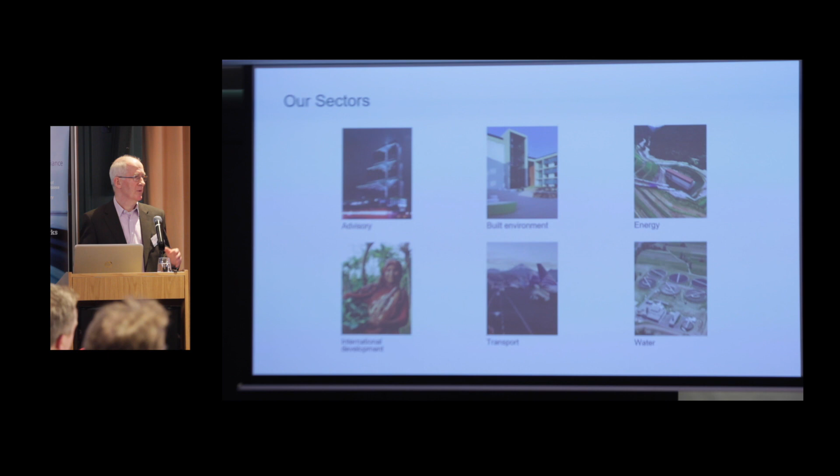We work across sectors - advisory, built environment, energy, international development, transportation and water. This project was primarily transportation, but with a significant amount of built environment, so we married those two quite successfully.

In Ireland, with offices in Dublin, Cork and Belfast, there's 150 of us, or more than that at this stage. The sectors we operate in are primarily transport, water and power - that's what you know us for - but we're also involved in the built environment and in buildings.

Within the overall Mott MacDonald group, there's plenty of scope for BIM. We're fully committed to BIM - it is part of our core strategy. These are just two extracts from our internal intranet showing the level of guidance we have within all these areas.

We have a whole series of documents telling us how we should do it, what we should do. On the right-hand side, we've separately had a Go Digital 2018 strategy for the last 4 or 5 years, and we're just about to achieve that - we've gone primarily digital at this stage, which is all part of the process.

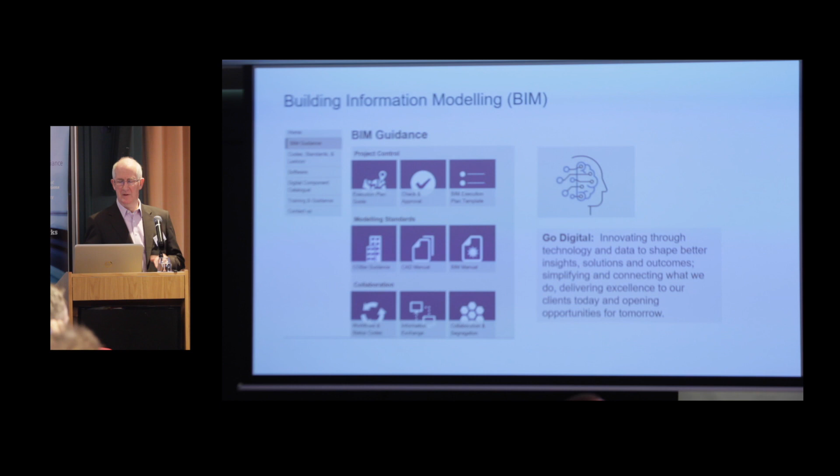This was where our digital transformation was in about 2014. We've moved on a fair bit since then.

So, Bergen Light Rail - I'll talk a little bit about it from a project manager's viewpoint. How did it affect my life as a project manager on the project? And John will tell you more about the technical details.

Bergen Light Rail. Bergen is a city about 60 degrees north, population about 300,000. Small for a light rail, yes, but the mountainous terrain meant that the development is linear, and that linear development is ideal for a light rail.

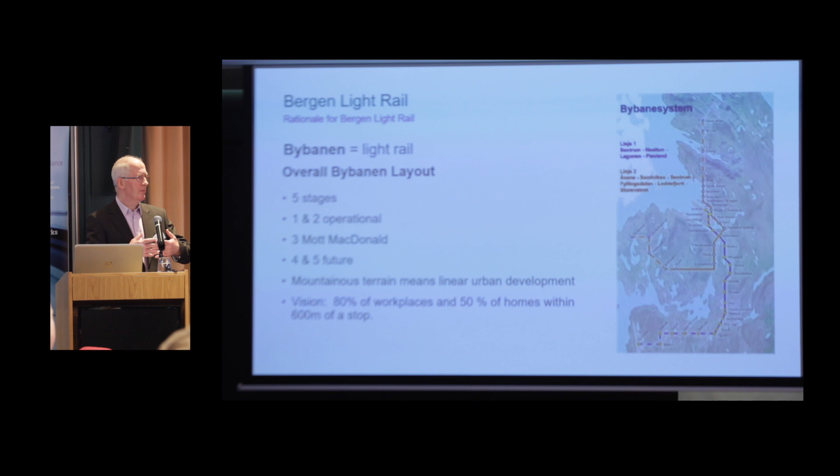The vision of the overall project, stage 4 and 5 future, is that 80% of the workplaces and 50% of homes in the entire city will be within 600 metres of a stop, which would be fantastic when it's fully rolled out. When we were appointed for stage 3, stage 1 was operational and stage 2 was still at design.

A more detailed look at the scope. There were 8 kilometres overall, 6 tunnels, 4 bridges. We had a significant maintenance workshop and depot. There was a parking hall there - a lot of snow in Norway in the winter, so you have to keep the trams warm at night.

An administration building. In addition, we had a two-storey park and ride facility with the tram and the feeder buses interfacing on the roof of the facility.

So this is a project that is ideal for BIM. It's a no-brainer that you use BIM on a project like this.

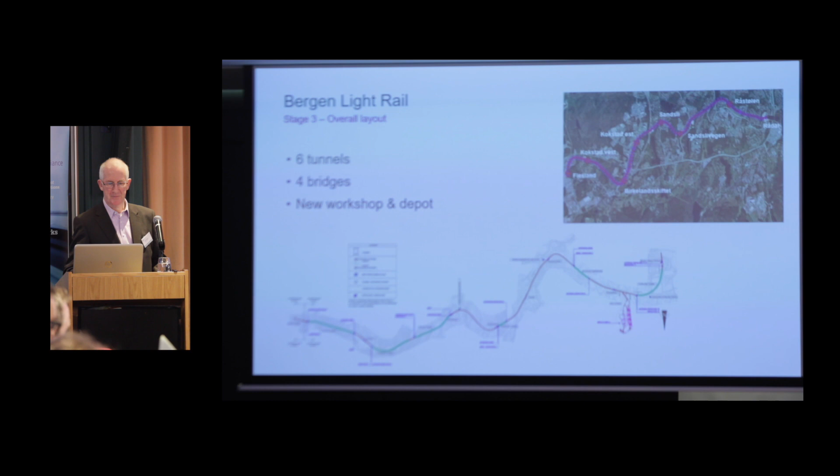This is the overall programme. We were appointed at the beginning of 2012 for the main project and mid-2012 for the associated depot project. The requirement to have the system operational by mid-2016 was a significant programme challenge, particularly when you take into consideration that our first task was optimising the client's concept design.

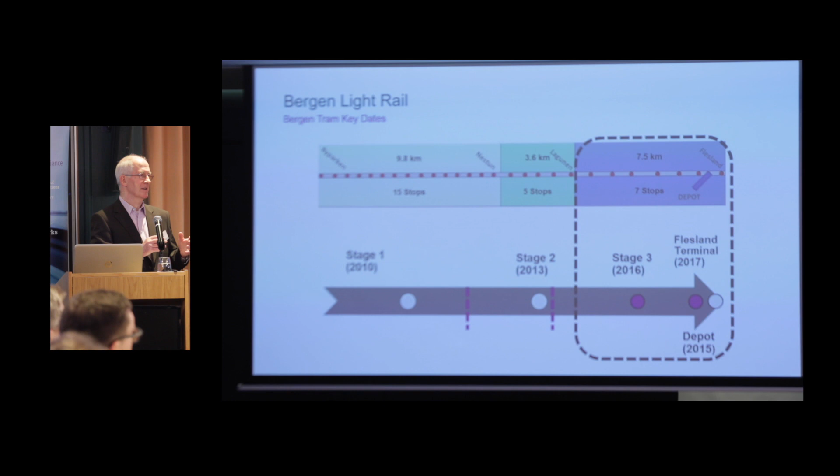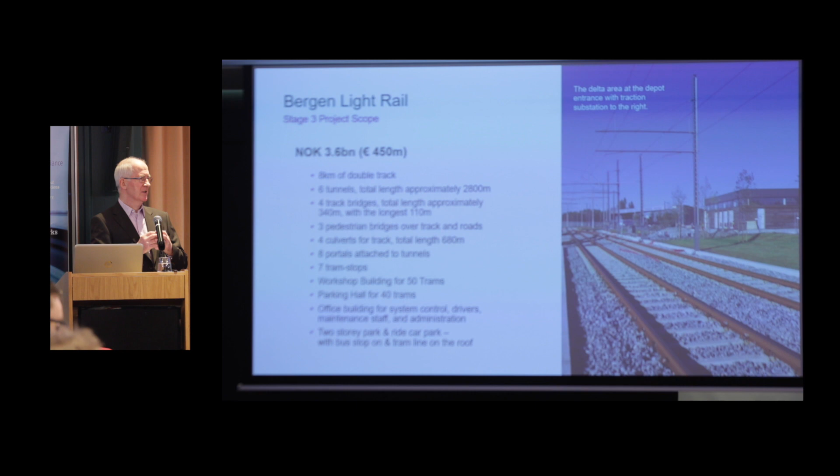A more detailed look at scope - this is the scope of the project. Our scope of services was full engineering, including architecture, and also the depots, maintenance depot systems, and the specialist equipment in the depot. The signalling and communications were designed by other specialists for the client, but our system had to support those and take account of those systems.

This then leads us to a project like this, trying to do it from Ireland - we won't do it like that. We need a broader resource, and our approach at Mott MacDonald is to use the right resource for the job with much less focus on where that resource is, and BIM enables that.

We had 354,000 hours logged on the project, which is the equivalent of 34 people for 4 years. 67% of that were Ireland-based people, and 75% was Mott MacDonald. Our overall project used BIM, using a CDE, but in support of that we had extensive use of our Skype facilities, our internal PIMS project management system, and our internal but publicly available ProjectWise system.

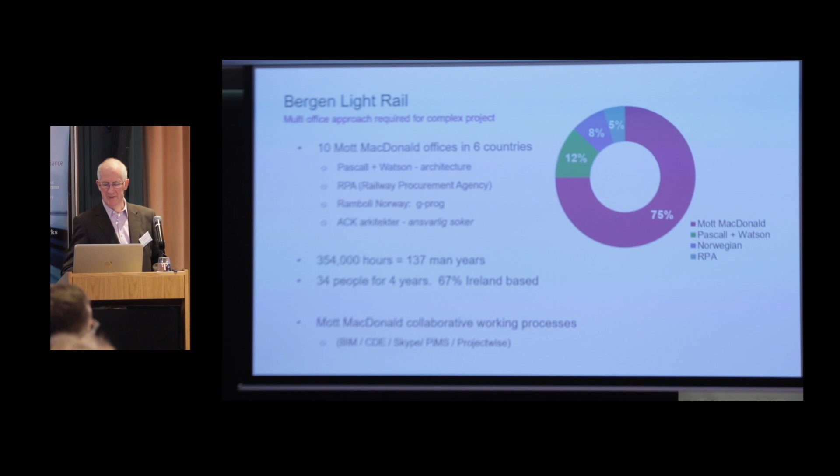So the challenges facing a project manager at the beginning of a project like this: it's a new country, we had no initial presence there. BIM was a client requirement, clearly defined as requirements. That was a challenge to us, but it was also an opportunity for us.

At the same time as we were starting our design and trying to get our optimization going, we had to set up a local office, complete with IT infrastructure. Over the course of the project, between the client and ourselves, we occupied 7 different offices. That didn't pose any real difficulties other than trying to negotiate with landlords. From our BIM side, it worked.

We had to assemble a multidisciplinary team across the offices and countries, based on having the suitable scale. We were developing the optimization stage while trying to get our BIM execution plan in place, while trying to hammer down the EIR and effectively get our BIM process running. We're starting from a project where we tendered, had a plan to do it, then suddenly you win the project, and then you have to start running.

And the client, not unreasonably, expects you to run fast from day one. We had a tight, fixed program, and compliance with program is a cultural norm in Norway. They can't understand why you don't achieve it. You said you would do it in a week, why don't you? I think they're right.

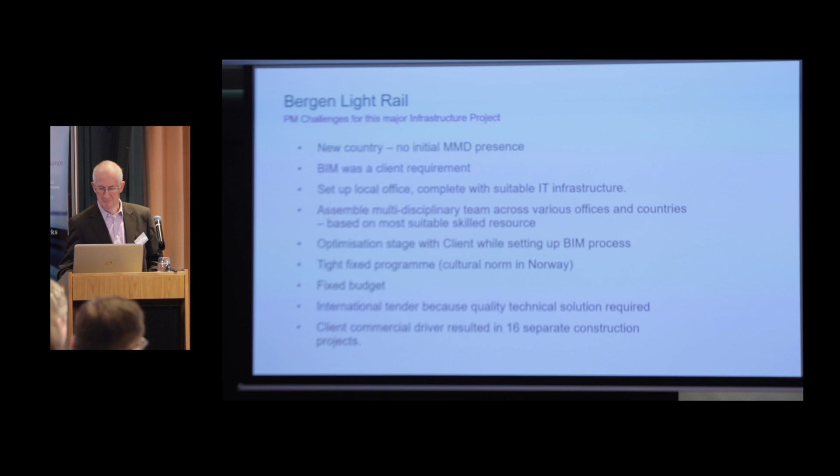How does BIM solve these problems? To me, BIM is one of a range of complementary tools. On this project, it was a client requirement with clear definition. We took an early decision not to set up a significant team in Norway. There were logistic and commercial reasons for that.

Yes, you need face time with the client. Yes, you need face time with the stakeholders. Yes, you need face time with your project. But the team who will be doing this will change as the project develops. So if you're trying to put all of those into Norway, it's a huge commitment. You're much better off letting them stay where they're best placed and use digital technology and a BIM process to run a project like that.

So for me, on this job, detailed use of BIM was inevitable. It was a no-brainer, and it worked for us.

The media reported project outturn. This was in the local press 2 or 3 days after the project went operational in August 2016. The construction cost had increased from 3.6 to 3.75 billion kroner, about 400 million euro in real money. That's a 4% increase, which is not bad considering there were fairly significant scope changes or additional scope within the project. To my mind, it was on budget.

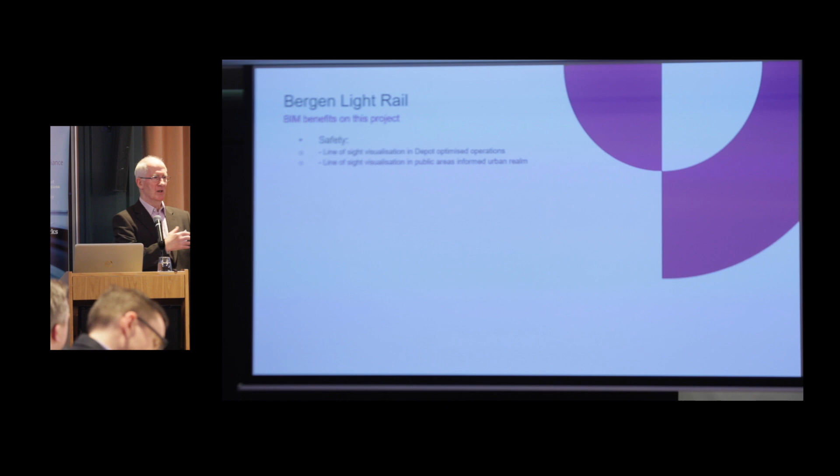Similarly, the line of sight visualization in the public areas enabled the designers to see what the tram driver would see, and that helps the design. It enables you to declutter areas and improve safety of the system. If you're working outside the BIM process, you'll have difficulty doing that. But it was fascinating to watch these models and see, oops, we can't have that there - not that it's in the way, but you can achieve a better line of sight and therefore better safety.

The Dyrhov Tunnel was interesting and unusual in that it was dealing with a tram line and a cycle track. You don't usually put those together, but we had to in this case, and they have conflicting lighting requirements - the tram wants it dark, cyclists want it bright. But with good modelling and being able to see it, the engineers were able to develop an appropriate lighting solution that dealt with both sides.

The advanced visibility of the final scheme was great, having the ability for the client, stakeholders and the like at an early stage to see how the project was developing and have input into that. It helped selling it to the community, helped dealing with stakeholders, and the client understood very clearly what he was getting as the project was developing.

Improved aesthetics - the developing model enabled the architects and lighting engineers to understand how both designs interfaced in the public realm area, and they were able to declutter as required and develop very good public lighting solutions.

Integration with adjacent developments was key for us. The last stop on the line is at the newly constructed Terminal 2 in Bergen Airport, and this was a parallel project. By having two compatible models that would talk to each other, after a little bit of pushing at the beginning, it greatly enabled that interface design. As well as that, when they were changing programme requirements and construction sequences, the fact that both of us were working in a well-developed BIM environment greatly facilitated that.

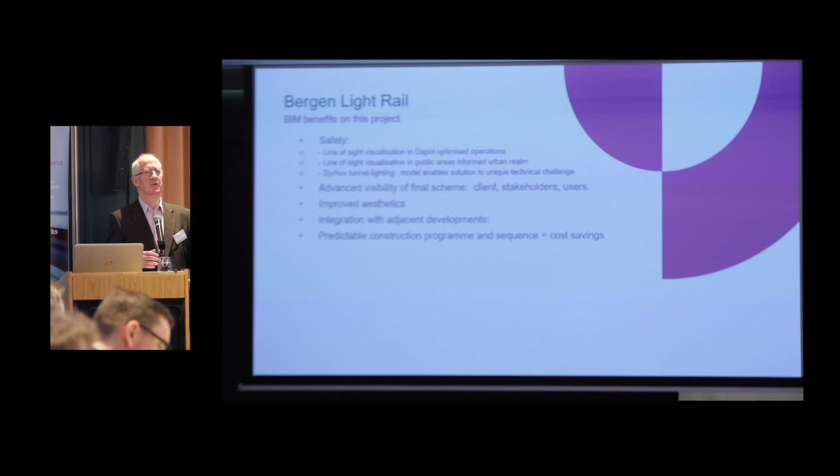On the programme, yes, we had 16 different construction contracts, and design was happening at the same time as those constructions. Construction started in July 2013, but detailed design continued until the end of 2014, and specialist design continued into 2015. But our clear BIM model and clear process gave credibility to the programme and the construction sequences, and this gave confidence to the tendering contractors, who were able to reduce that element of risk within their tenders, which in turn is a cost saving for the client at the end of the day.

Value for money - it's anecdotal, but for me, without question, it's value for money for the client when you're designing in a BIM environment, developing a parallel digital twin, seeing how everything works and comes together, dealing with clash detection in a model before you go out to site. We also benefited from having the client's input - the client had specialist teams on the project, and his people watching the model develop were able to work with it, interrogate it and contribute to the design as we went along. They knew more about some of the elements than we did, so it made sense to bring in their skills and abilities.

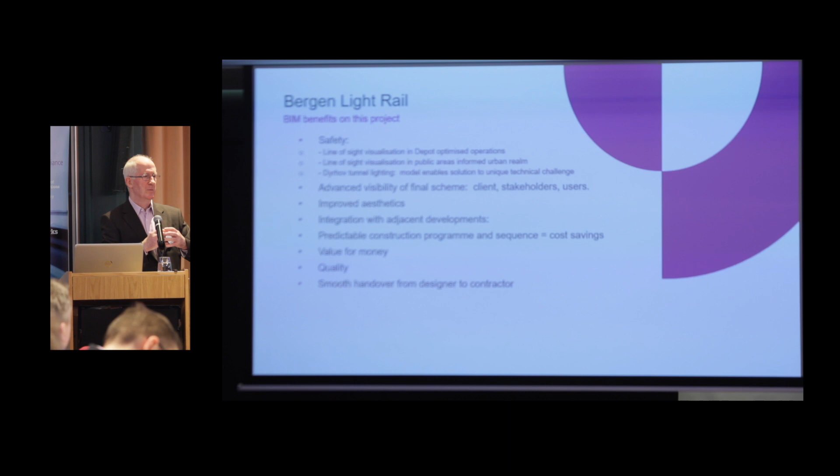Quality, to a certain extent, came from the ability to draw the skills into a model and work together in that model. We had a very smooth handover from the designer to the contractor. We had confidence in the design that was developing, and design continued while construction was going ahead. Because it was all detailed and captured in a proper process within the federated 3D models, it was clear to him, and the whole thing ran forward quite smoothly.

For example, we integrated our BIM information into a cable management system. We designed the cable management system, and using an internal database, pulled all the relevant information together. John will talk in more detail about it perhaps. With GIS mapping, we were able to give the client, at the end of the day, a fully detailed, fully located, asset-rich cable management system, which he then takes through to his operation stage.

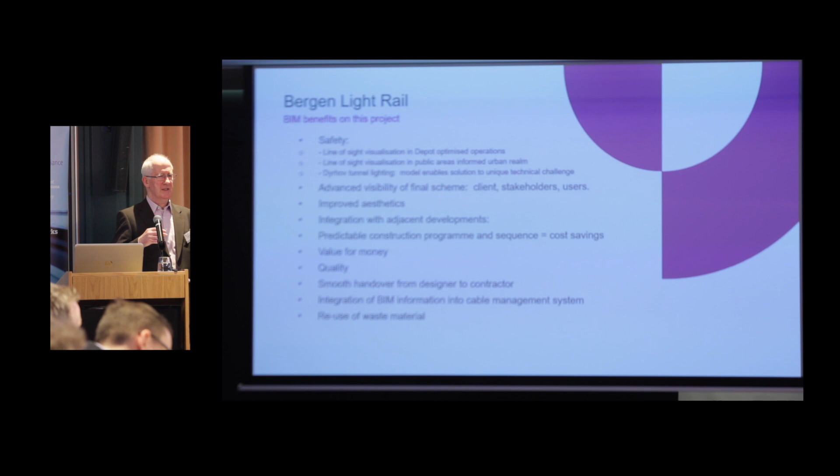Reuse of waste material was important, and in Norway it's important to understand that rock is a waste material, not like here - there's so much of it they can't get rid of it. On a project, you really have to manage that. With the BIM process and properly developed models, we were able to use cut surfaces, excavation requirements and the like to understand clearly how much rock would be available at all stages, and manage it to try to reuse it. Bear in mind we had 6 tunnels in the project, all delivering big quantities of rock by different contractors at different stages. Without a BIM process that wouldn't have been possible. With the BIM process, you can reuse it and cut down cost.

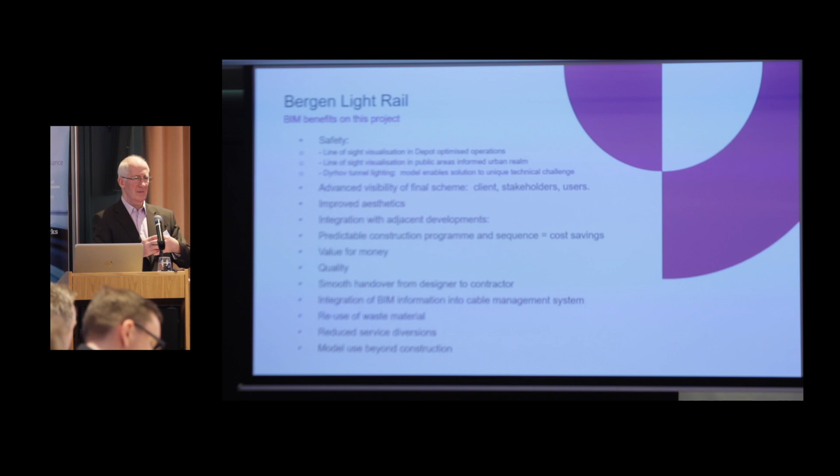Our model use went beyond construction - we have an awful lot of information within the model handed over to the client. I believe everything he needs is there, and my way of assessing that is that in our contract we have a 5-year defects period - not defects, but effectively a period for which we're responsible beyond the operational date, the middle of August 2016. So far we've had 3 very minor queries in a year and a half. We must have done something right. He must have the right information. Either that or he's just not talking to me anymore.

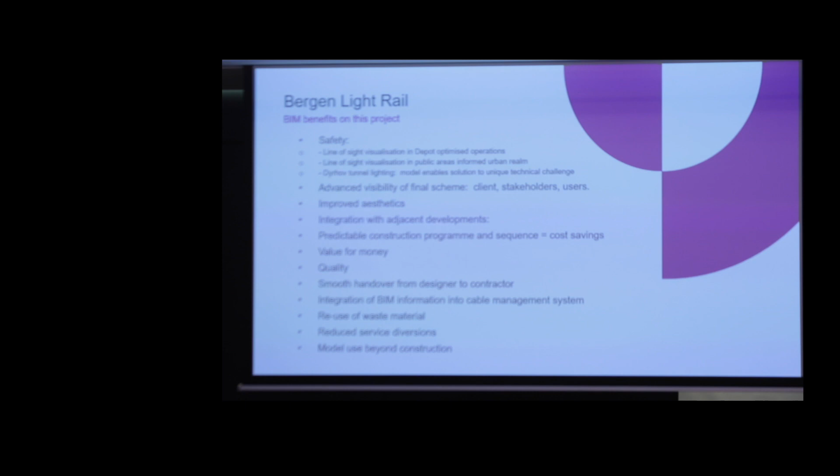So, what did I as a project manager learn from this project? Early detailed planning is essential, including getting a BIM execution plan up and running, hammering out your EIR at an early stage, getting a clear understanding, and also having a design development plan which matches both of those.

It's critical to have suitable hardware capacity, internet connectivity, and telephony infrastructure available to you. In places we struggled at the beginning because our internet wasn't up to scratch, and some of the telephone systems weren't up to scratch. It took us a while to get that up and running, but it has to be right - don't underestimate it, put some money aside to cover that.

Another lesson for me was that buy-in by the whole team is essential. Any 2D-only elements or non-compliant processes are problematic. I know this poses a challenge to SMEs, but you can't have a BIM project that has outliers. It won't work, it'll pose problems. We had a few and we had to deal with them.

I suggest that training and upskilling should be considered at an early stage. I think that in any project like this, we all need a little bit of understanding of what's happening.

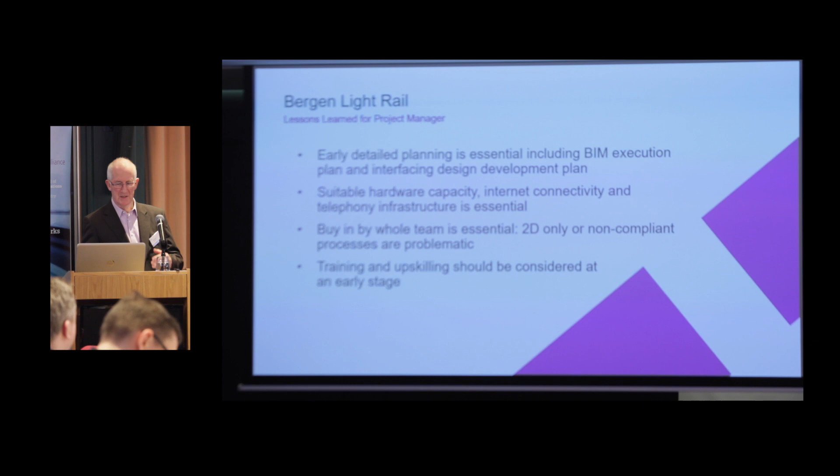Future direction - John may talk a little bit more about the future direction, but I just took a look at another project in Sydney that's more recent. It's at design stage. It's a JV for a RIBA 2 stage station design, and there was significant coordination required in a very complex project, probably substantially more complex than the Bergen one.

One of the things I was interested and impressed with is that they used virtual reality at an early stage with random potential customers to get feedback on station set-out and station operation, and it was done early enough to properly bring it back into the design. It's the 3D version of human factors, but it was important - showing the customer what he'll get, what he'll be using, hearing what he's saying, and taking it on board.

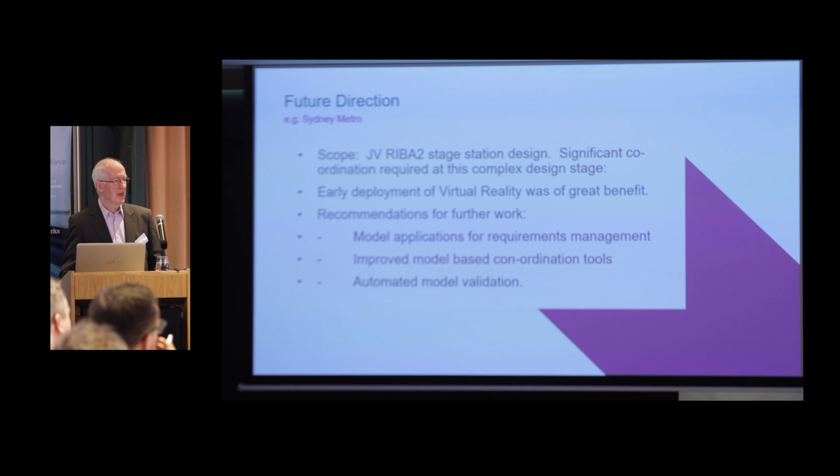I can go into more detail offline on this, but that team's recommendations for further work were that model applications for requirements management need to be developed. They would like to see improved model-based coordination tools, and a direction the software suppliers are probably heading is better automated model validation. It's not there yet, but we need to get there.

For me, the positives, as I've said once or twice, are visualization and interaction with the client and stakeholders. It was great sitting in different offices, playing with the model, letting the client see what was happening. It's the way projects like this should work. Non-technical people understand models much better than 2D drawings. In the past we've thrown 2D drawings in front of people saying, isn't this great? They're not trained, they don't read them. Show them the model.

As various people have said, clashes, especially with existing infrastructure, utilities and the like, can be resolved prior to construction, saving cost. In our case, we were interfacing with the utility companies and the permitting authorities, and having clear model information and clear existing information enabled early approval of what we were doing, which was important for the program.

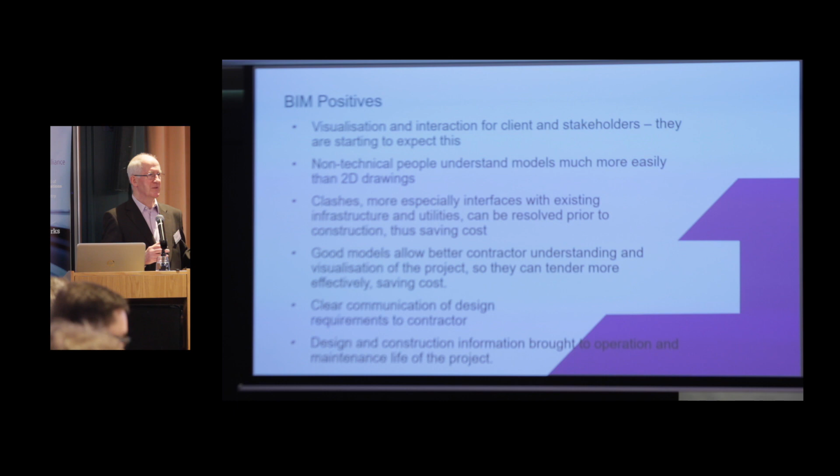There are some negatives I think need to be addressed, or at least considered. We're developing skilled modelers, but we need to maintain engineering and construction abilities.

On projects, notwithstanding BIM, we need full change management discipline. We can't change just because it's possible; you only change if you have to. At all stages we need to understand the provenance and status of the models. Sometimes that's not clear to people, they don't understand. It must be clear, you need to understand what you're looking at and what stage it's at.

Again, we need suitable hardware capacity, it must be there. You need a suitable CDE set up, and with that, a clear understanding of ownership. That's very important, it hasn't been hammered out yet. It's going to be pushed around for a long time, but until there's that clear understanding of ownership, I think we have a problem.

We need to allow for, on an international basis, cultural and language challenges. It's not all English, it's not all UK oriented. And finally, the application of BIM as a cost to engineering consultants is not always recognised by clients, but I'm glad to hear Paolo saying he's getting more aware of it.

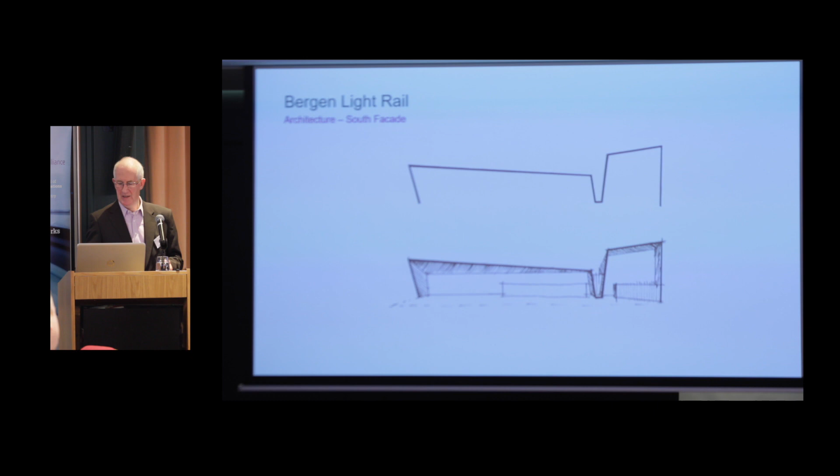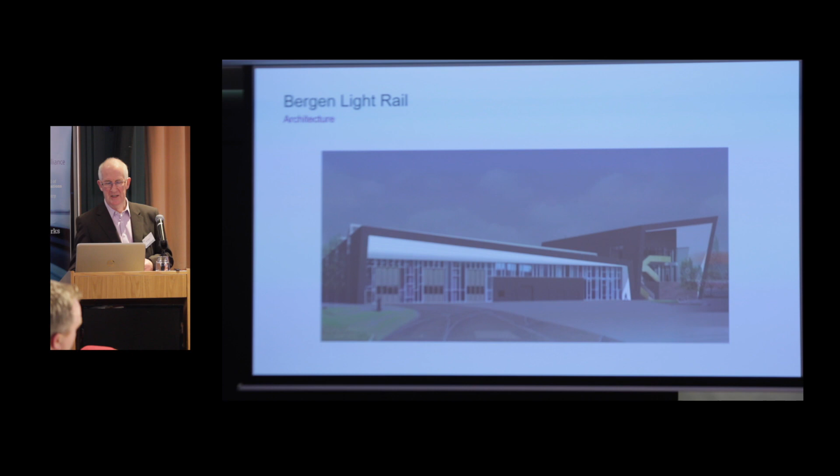That shape then becomes a space, still sketched, but developing in a model. That space is developed in more detail, and this is a shot from the model, and at the end of the day, that becomes the building. You can see the thread going the whole way through, and that is enabled by BIM.

So I'll let John talk to you about the more complex stuff. Thank you.

It's becoming business as usual. To be honest, different projects have different levels, but as a company we have the system set up so that effectively BIM can be delivered now. We're also looking at automation. We have a strand on data science, and another service on smart infrastructures, smart cities and digital twins. So those are the other trends, just as BIM becomes more mature, these are the future trends we're also looking at.

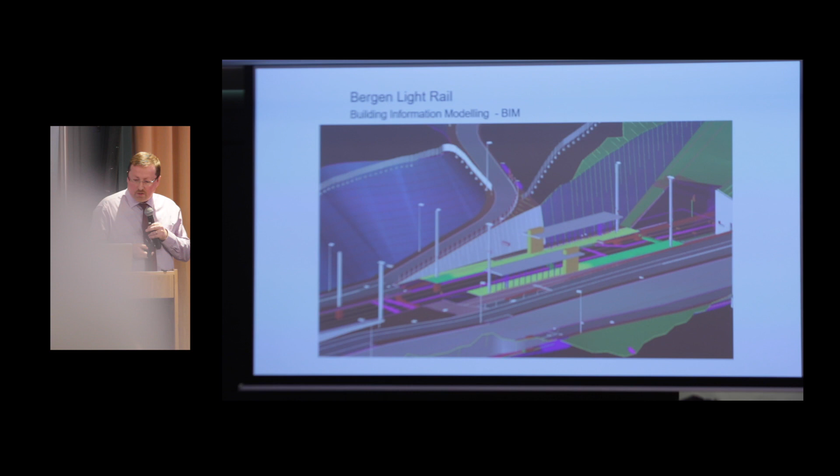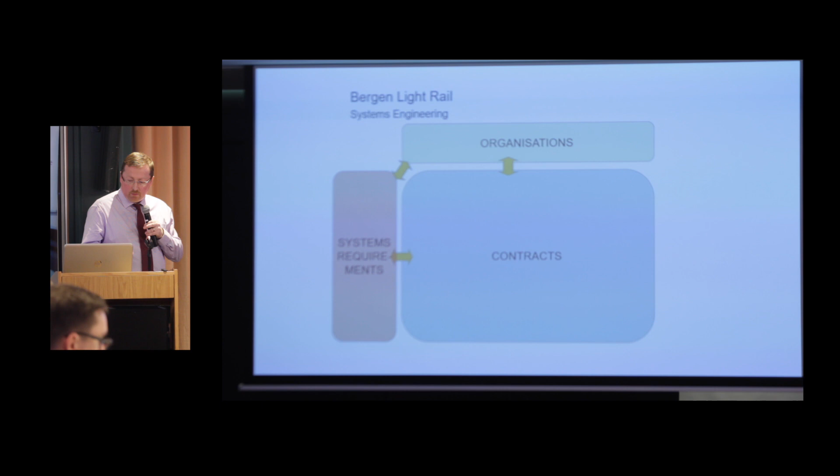But just to talk about BIM on the Bergen project, that's quite an early shot. I suppose Jim showed you the scale of the project, and maybe just to show you the complexity, we have the way it was put up. I created this diagram just to help me understand.

The organisations at the top are effectively the approval bodies, and on the left-hand side is the incoming requirements, the ground conditions, the existing system as it stands. In the middle there's a sort of suite of about 14 different contracts. The red ones were designed by others, and the blue one was designed by Mott MacDonald. The big blue package in the middle is really the main civil contract. This is a sort of schematic, because effectively that civil contract is maybe over a 5-kilometre section.

So there was maybe 6 of those types of contracts, multiplying by the other packages. So when we started the job, the question was, the client specified BIM, and the question was, well, how much does he need? And the key point for us, which I'll come back to, is that you can really get bogged down in the detail if you don't keep your eye on the ball. So really we picked a view of the amount of BIM.

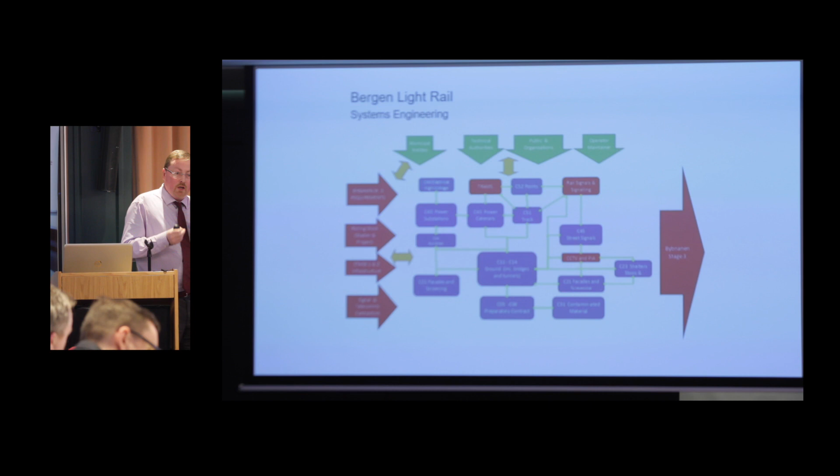On the one hand, the documentation would of course go through to our CDE, but on the other hand, the modelling would effectively be at the physical level of objects, cabinets, concrete bases, walls, structures. We weren't going to necessarily model every single component. For some objects, some projects, some parts of the contracts, we went in more detail, but in general, as a bottom level, we asked all our design teams to model the main physical interfaces, the physical infrastructure, walls, surfaces, lights, cabinets, things like that. And then having that model allowed us a sort of base for the overall project.

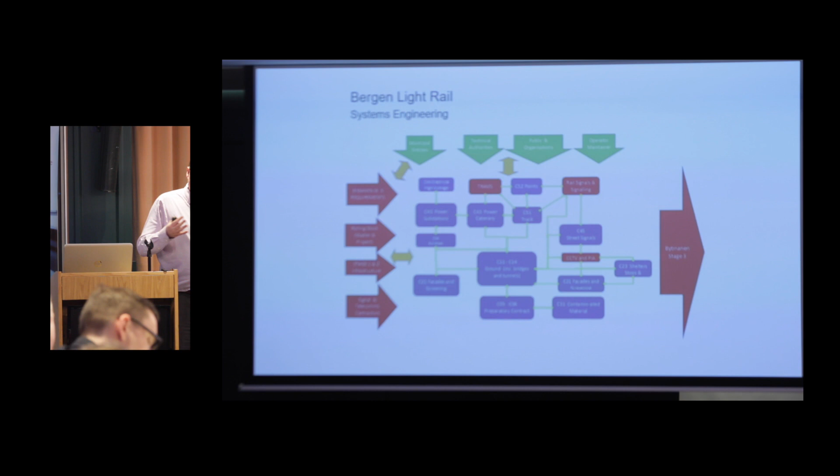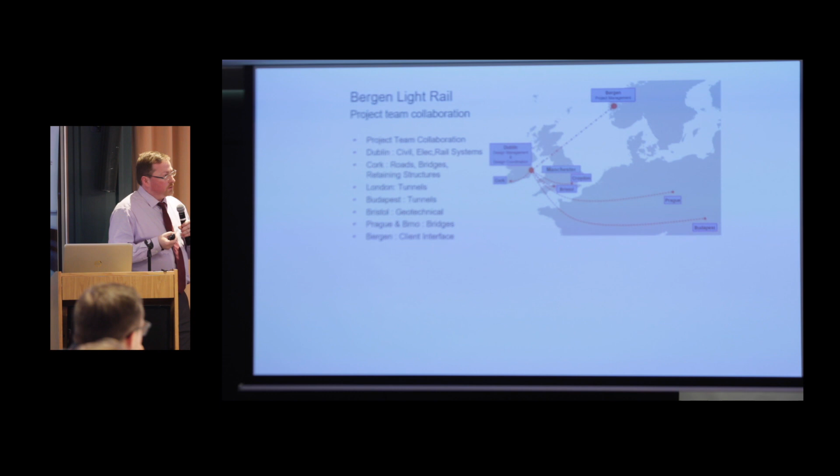Just the distribution of the design teams - there's probably a lot of designers here with Dublin, Cork, and UK, Bergen, and also Eastern Prague and Budapest. Different disciplines were coming in. We also had collaboration with Pascal and Watson, who worked as the architects, and RPA, who helped with the depot operations. So the collaboration is kind of key to one of these successful projects.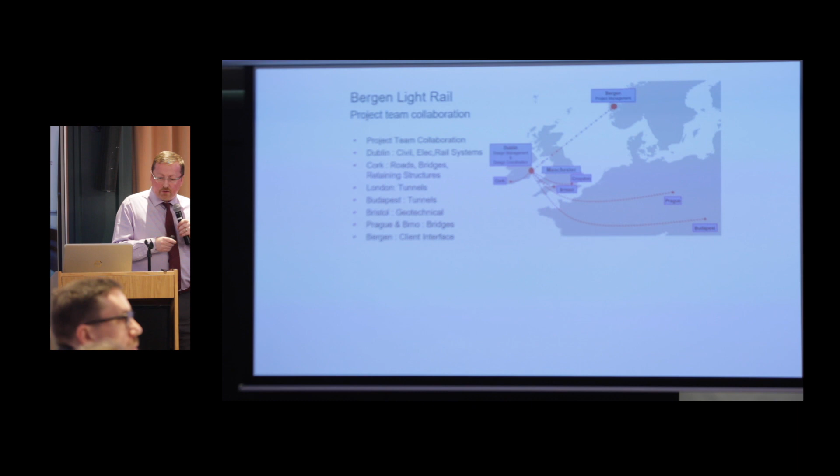To be honest, one of the reasons it was successful was that we had the design scope of the whole project. So in a way it was our risk to do the collaboration. Sometimes when people fragment the whole contract structure and then ask themselves, where's the collaboration? It's harder to achieve, put it like that. So that was the project team, very distributed.

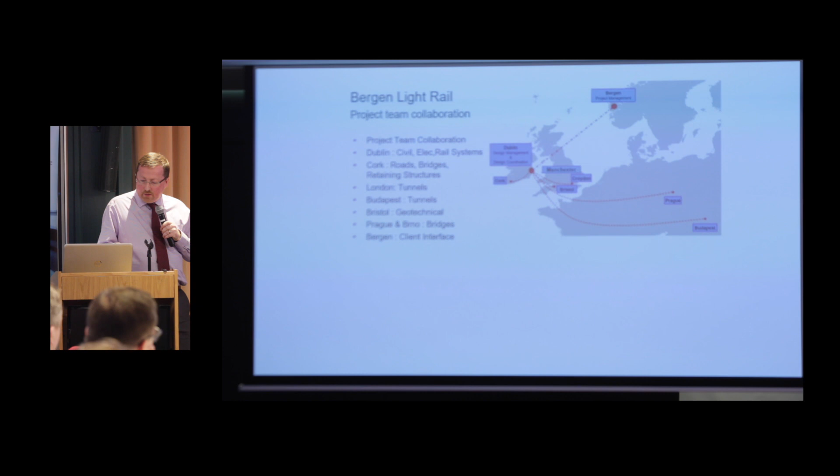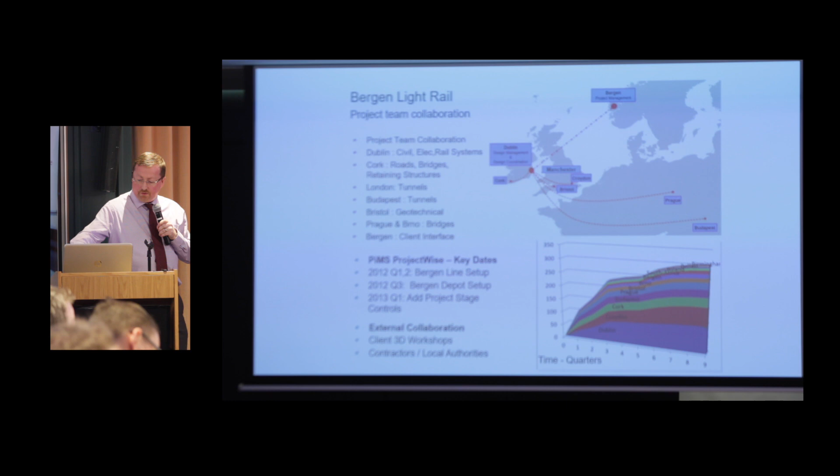And this, I think for me, this one shows the main benefit of BIM, which is really the fact that we have all these maybe 6 or 7 offices. And if you look at the bottom graph, that's sort of in quarters, like 3 months. So the point is, by having processes in place and design teams already available around the place, you can actually bring on teams quite quickly.

So after, say, 2 quarters, we had over 100 people registered and working. They weren't all full-timers, but they were registered and working in the CDE within half a year of starting the project. And that's the big benefit of BIM - you're talking about efficiencies, but not necessarily efficiency on one job. It can be efficient for a design team because they can work on 6 or 7 jobs, on and off the team, into the CDE, out of the CDE, and when they're not needed on that project, they can just come off and go on to another job.

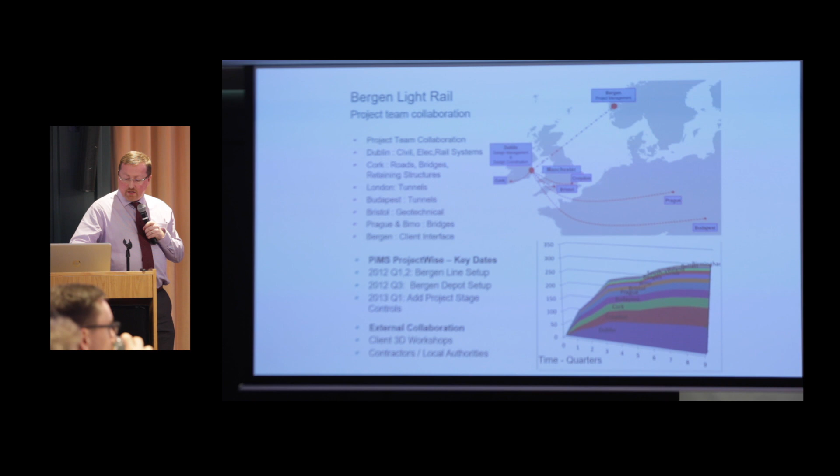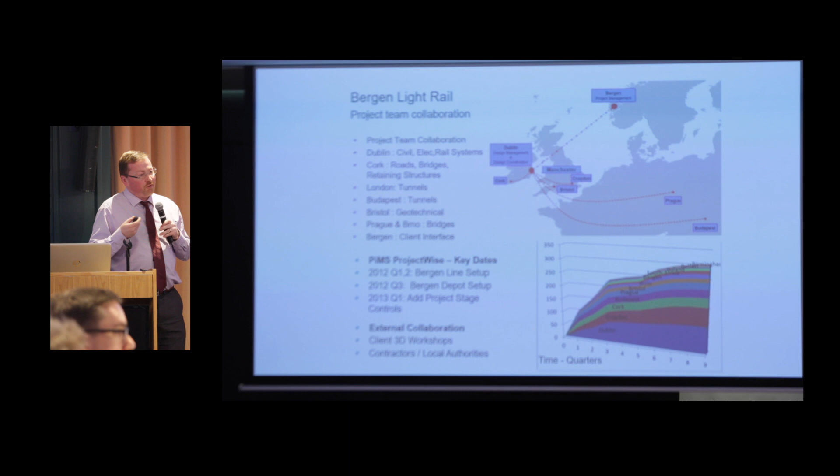So external collaboration - we also worked with client 3D workshops, and that's the other big advantage when we had BIM. We were able to produce models reasonably early on, and clients, especially with the language situation, are very interested in looking at progress, and it's a picture - it's more than 1,000 words. It just communicates exactly what you're trying to show, and sometimes what you haven't designed. That's another classic thing from a model. But it actually puts pressure on your own design team as well, so there's a kind of positive pressure.

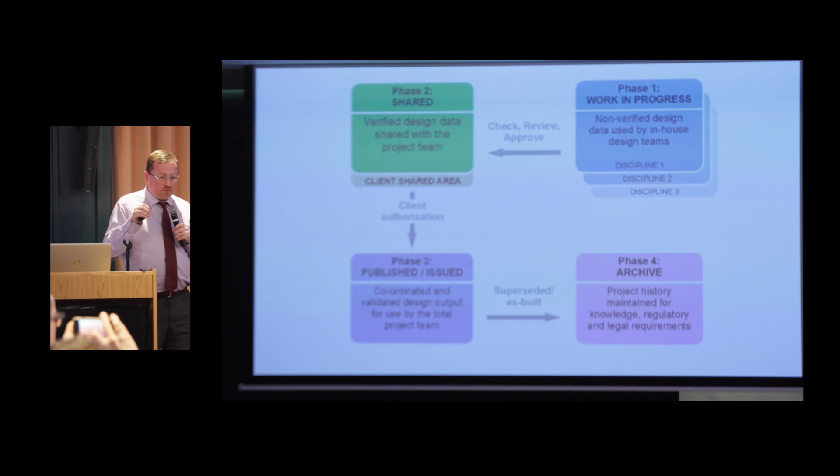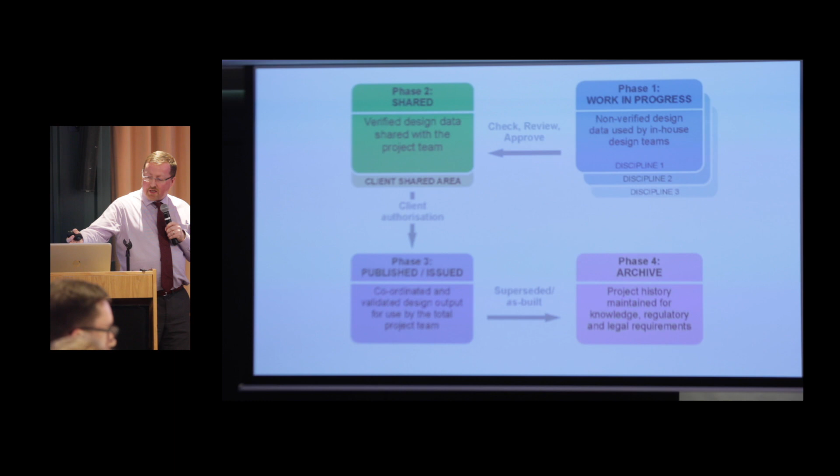I'm not going to get too technical, but this project was specified in 2011. It wasn't called a Level 2 BIM project, but within Mott MacDonald we were using the BS 1192 and PAS approach, with the 4-stage workflow set out as such.

We tracked changes, deliveries and issues - this was several years ago, so we had our own database for that.

From a case study point of view, on every job you have to look at what software you're going to use, because the client never necessarily mandates the software itself. We looked at the features of the software, the interoperability between our teams and their skills in the software, hardware network requirements, and client contractor compatibility.

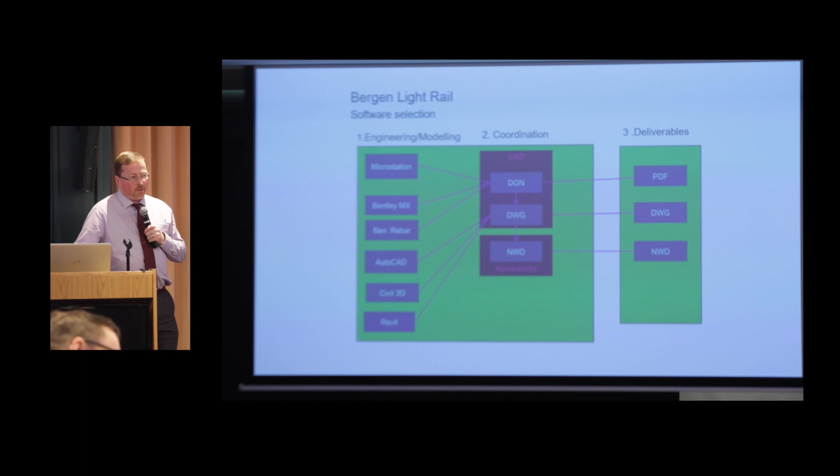So it's approximately a Level 2 structure. The key thing, which wasn't really specified in detail in the contract, was this level of development, level of detail, and where you draw the line, because you had so many design teams and so many contractors.

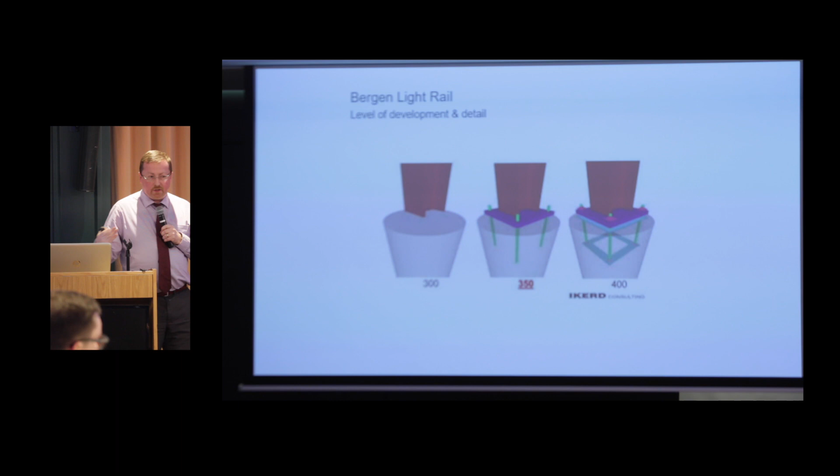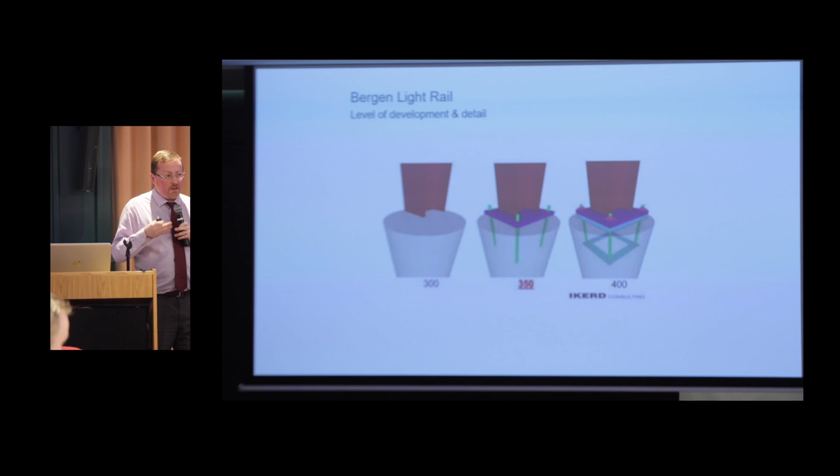To be honest, the middle level is what's shown, but often we achieved the one on the left-hand side, the 300. We didn't model nuts and bolts, so we didn't really achieve 350. But an important point is the contractors didn't need us to, because you have the model and the drawings. There's always a step where you check the drawings, and that relationship between the two is about how honest you are about how much you've actually modeled versus just sort of drawn. If you've been honest about what you've modeled, and the drawings are just supplementary information, contractors are reasonably happy with that arrangement.

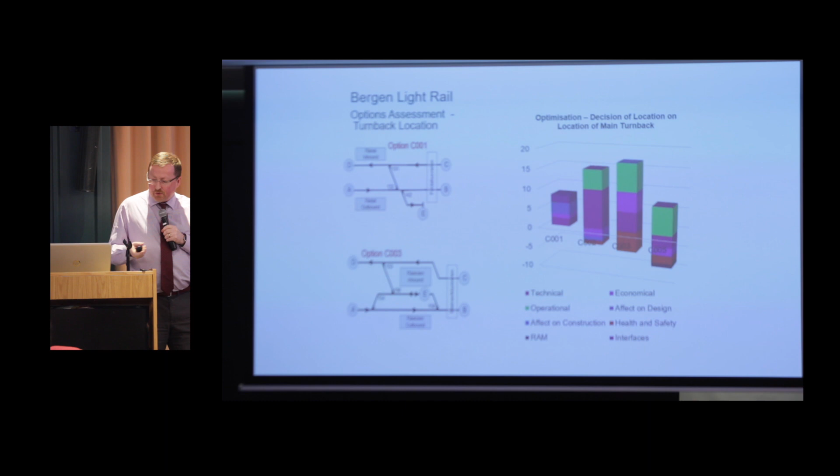Just to touch on a couple of examples where having BIM was a benefit to people: at the start of the job we had an optimization phase, which is unusual - to get a contract and then be told to optimize it in your first phase. But I thought it was a very good idea.

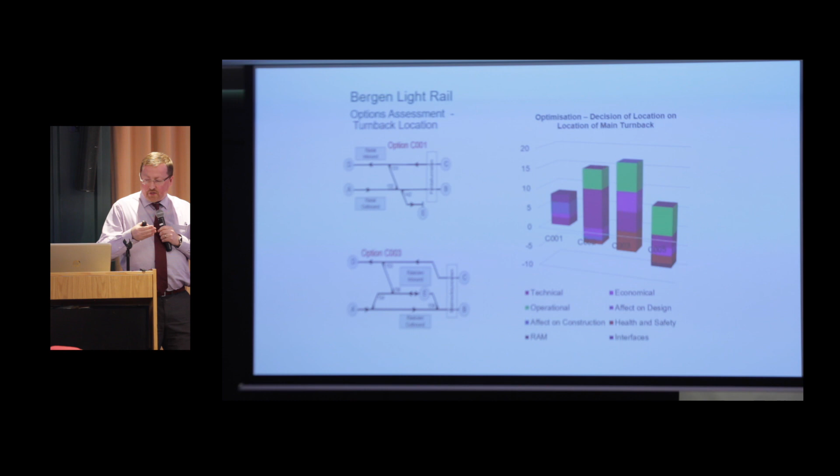We optimized about 50 points, a sort of design optioneering, but it was a fixed program - I think 4 months we had to do it in. We had different scenarios for a track arrangement on the left-hand side, and scored them on the right-hand side against 8 dimensions - what's the preferred option? I think option 3 is more plus than minus. This is a turn-back track arrangement.

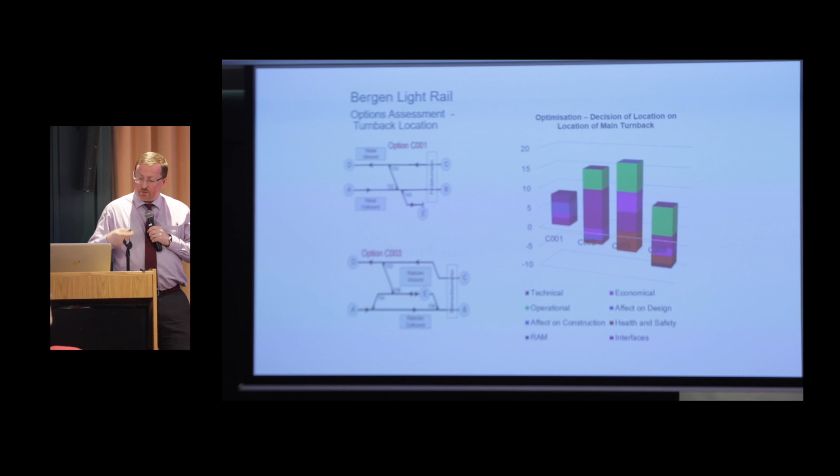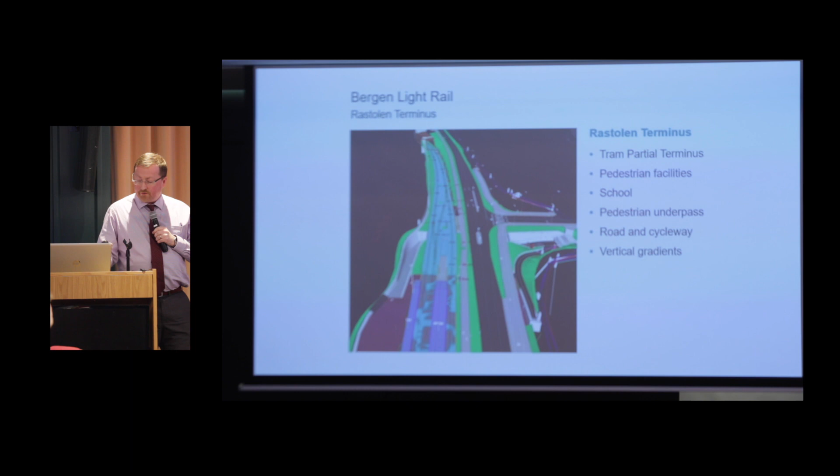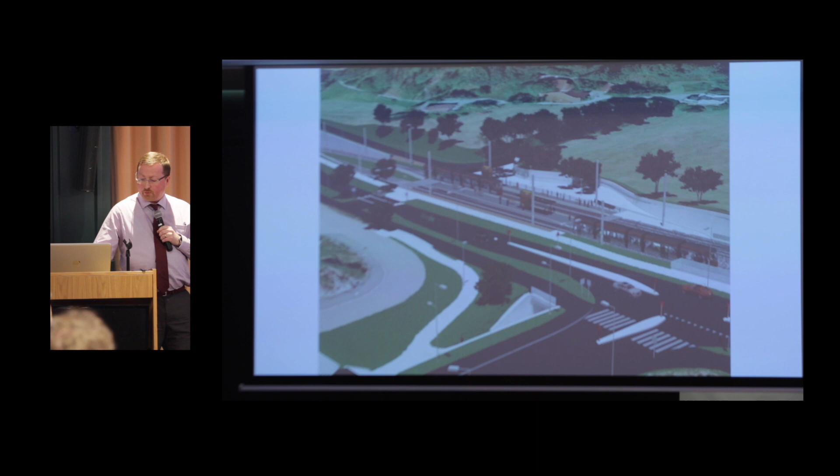That was agreed, and we did some transport modeling as well. Then we did the basic design - that's the engineering design there, so it was done and proven. Then there were information days, so an information model was generated as well, which added some additional surface rendering and so on.

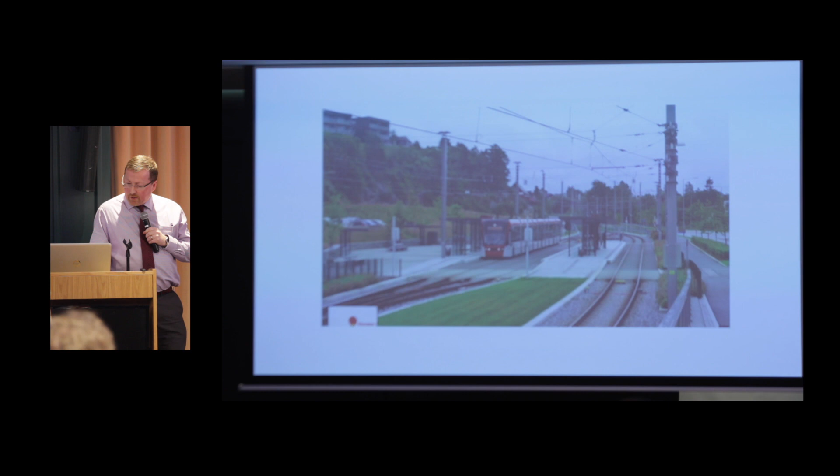And then, I picked this one up yesterday because you can actually go into Street View now. So that's the final product, which is not too far away.

This is another example to give you the flow. This was the original, like Jim says, your modeling and your sketches. It's really a cycle all the time between your sketches, your models, your design, and it goes around, and sometimes you go backwards and forwards. This is the sketch of the airport terminus, which is subsurface, so there's passengers, elevators, that sort of engineering side of things.

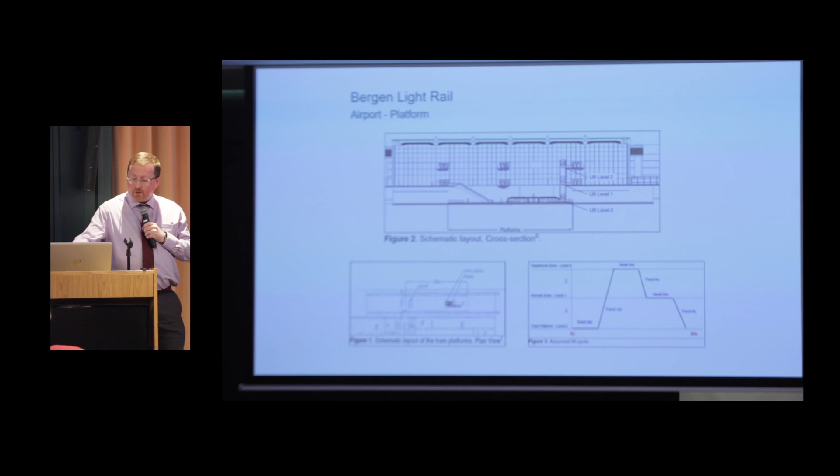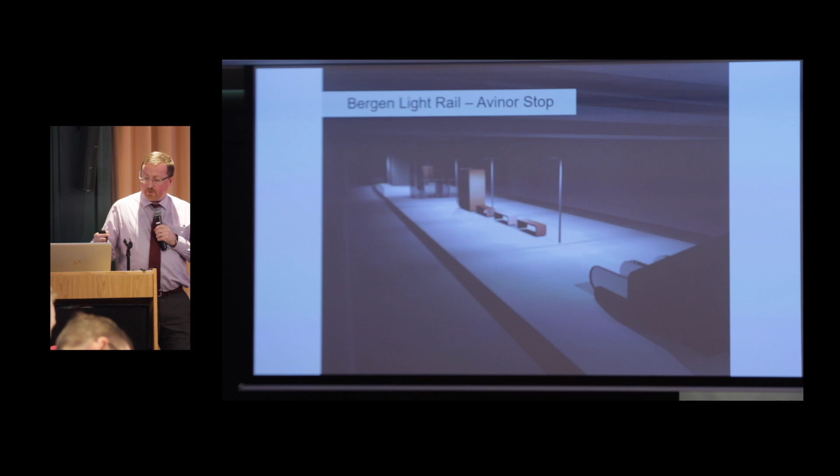The modeling itself is quite easy usually. So we modeled the base, the tracks coming in, and then we were able to look at—the modeling didn't involve the pedestrian in this case. The model was more looking at the lighting, spacing, and general layout.

That's just a picture of the construction, from last summer, and that's an actual real photo. It's a very sunny day in Norway. So in a way, with the modeling, you're showing something that people can see in advance. There's a trust factor, and a chance that you can actually prove that a good design works as well.

So you're making a case for a good design, rather than optimization just meaning removing features—sometimes optimization doesn't really work that way, it's more like value engineering. So this was a true optimization exercise.

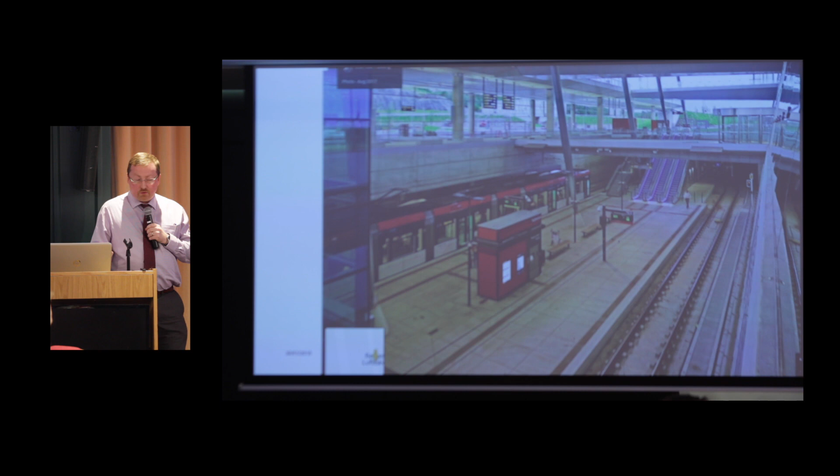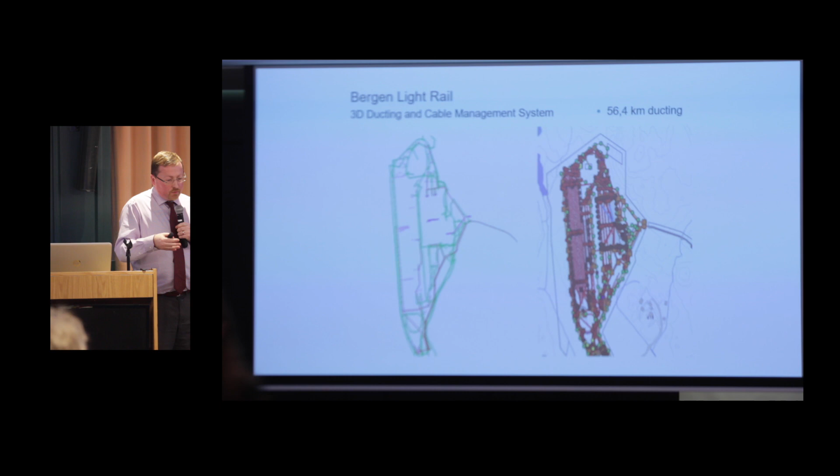That's just an example. Having the model, we were able to also quite easily add on a cable ducting system, since we had the whole thing in 3D anyway. So we procured a database system, which allows us to do all the cable routing up and down the network, which the council liked because they had that same system for their city.

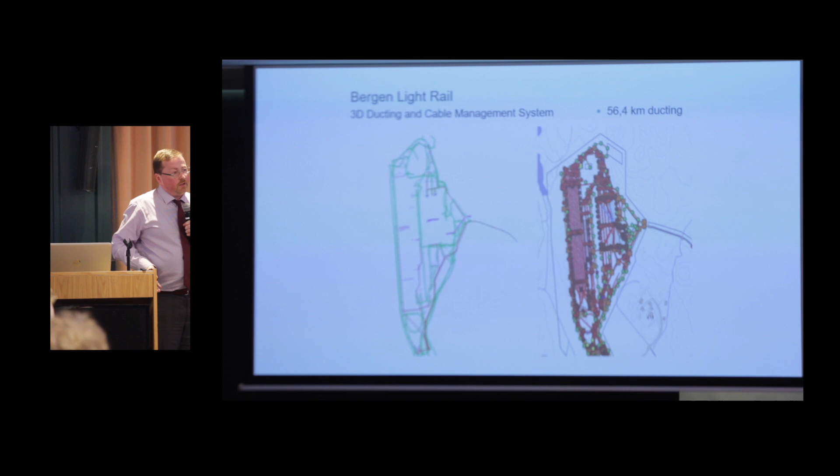So actually we handed them over a GIS. We produced flat images to give them a GIS solution and a database, and said here's all the cables—that was the depot, but also for the line as well. So that was kind of an added value thing.

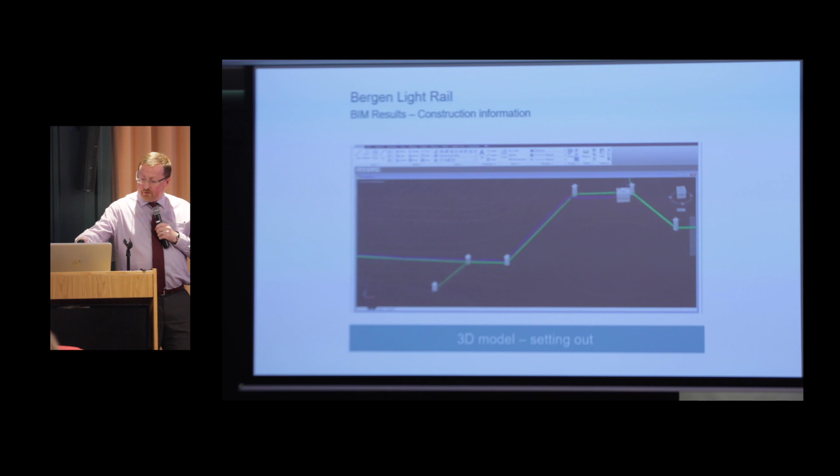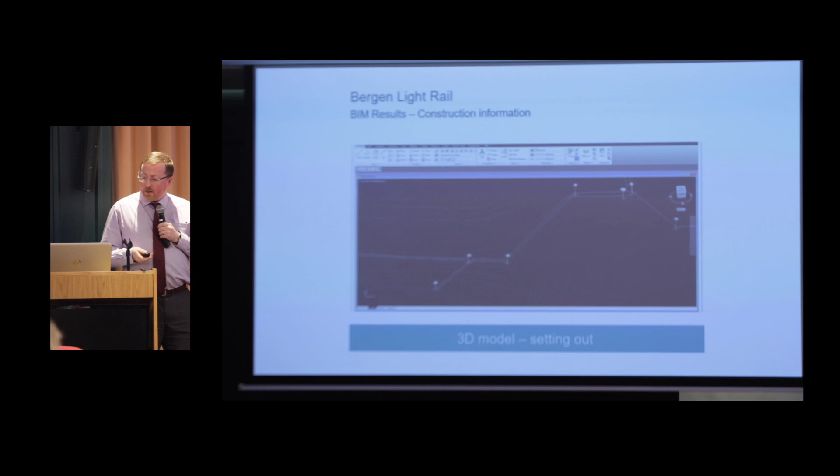Another point is the models were obviously in 3D, and we were able to produce—the contractor asked for a particular format, so they just needed the bottom string of the ducts. We produced that format in CAD, DWG, with the ducts in the corners—that was the specific data he needed for his setting out information.

It's important to mention that the thrust behind the project, as far as BIM goes, was that the client actually asked for BIM. He wanted this, this, and this, but specifically said he wanted the BIM to be developed continuously as a design tool, and also used by the contractors for construction. It was quite a simple brief, only a page and a half, but it said what they wanted, and he didn't get bogged down too much in standards.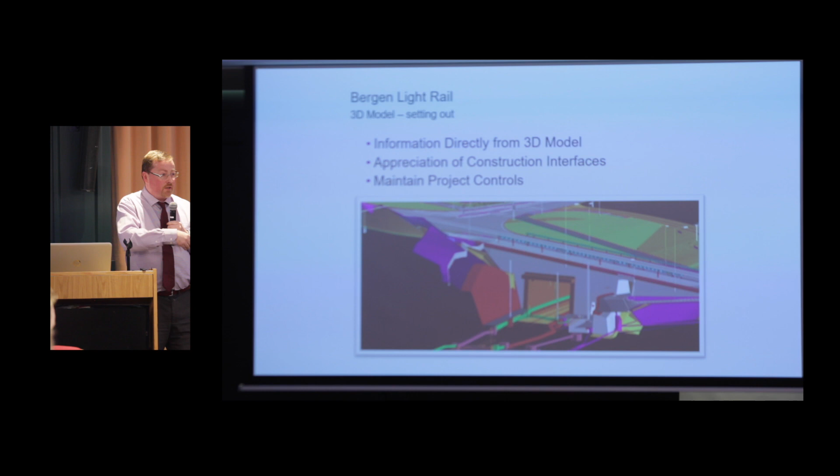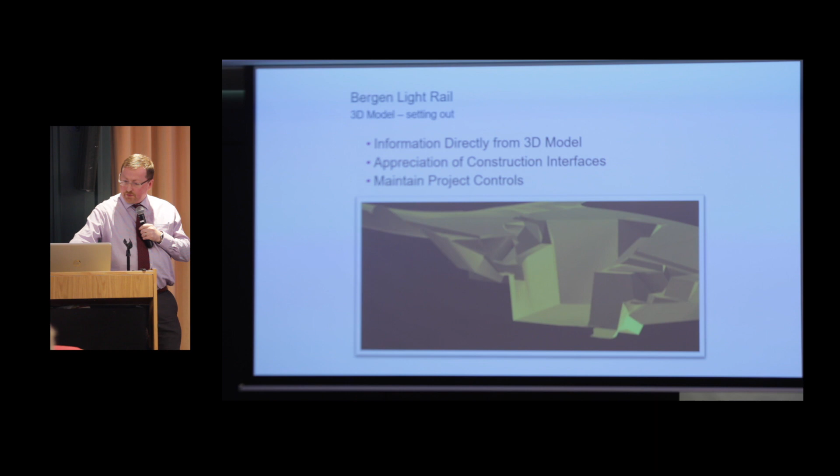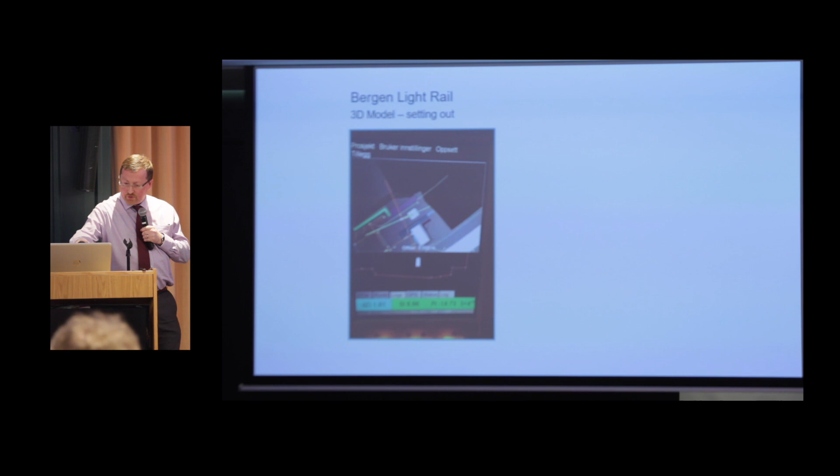That's an example there of a track going under a road, and then the surfaces, the cutting out sections. This is a cross section of that example, which went into an excavation machine—that's the excavator doing the work. That's showing they were working off the model information we provided during the construction phase.

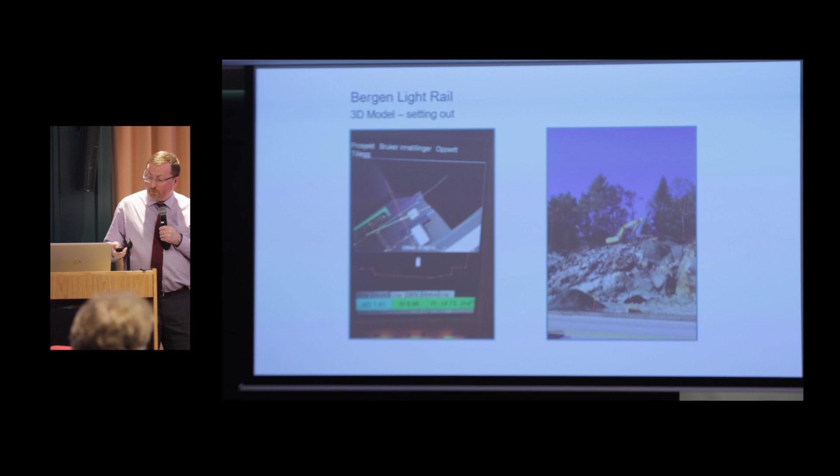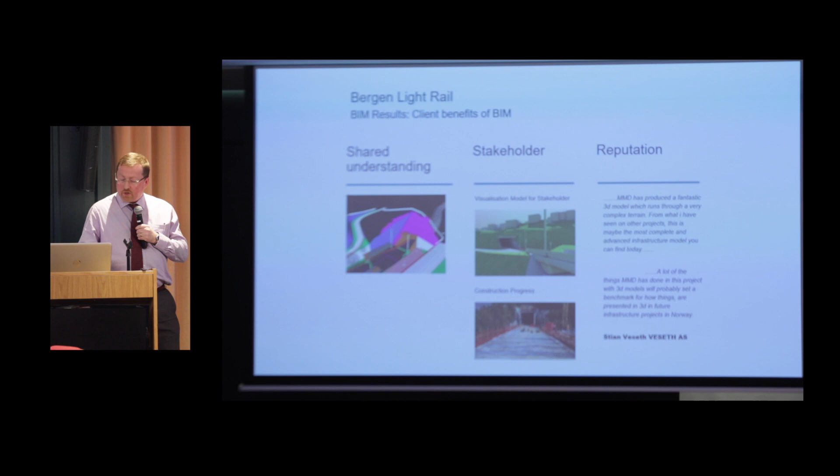I had to summarize this. These are the key benefits: shared understanding of the design, very good for stakeholder interface, and an advantage for us was it was good for reputation, but I suppose it's good for the industry if we're doing projects like this. So I just summarized.

If anyone wants any questions afterwards, that's no problem. Just to summarize where we are at the moment—well, no, just to summarize on that project.

One point was the handover. As Jim said, we had an awful lot of different contracts, but the models created a level of trust, with 3 or 4 big civil contractors. They definitely did challenge us, but we were able to show—you have the spec, the drawings, and the model, now what's your question. Often there were things which weren't modeled, that was their question. But on the whole, the handover between design and construction was reasonably successful.